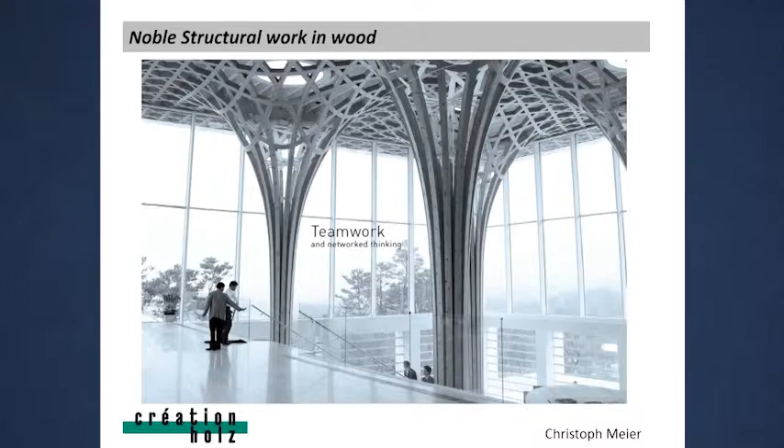Thank you very much, Stephen, also for this invitation. It's the first time I'm here in Canada, and I've enjoyed it very well from day to day. And I hope it's not the last time I'm here.

In our timber team of about 15 engineers and technicians, we realize complex projects around the globe. Of course, for us, wood as a material is sustainable, beautiful, and the best. This is a challenging specialty of our office, and I'm going to tell you something about this work.

I would like to explain briefly how I came to be here. During the holidays in the south of Switzerland or the north of Italy, in a vineyard called in Switzerland a Grotto, I discussed with my wife over a glass of wine whether I should take up the challenge and accept this trip to Canada or not. Canada is a popular country for Swiss people wishing to emigrate and wanting to experience the great freedom of this country. So I said to myself, if not now, then when. After the second bottle of wine, the decision was clear.

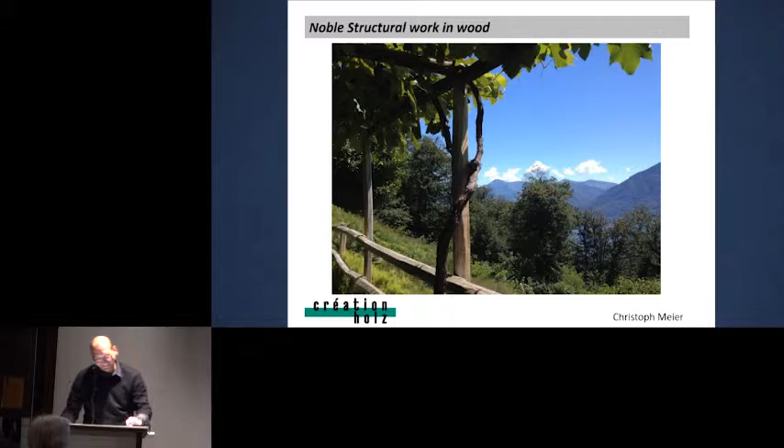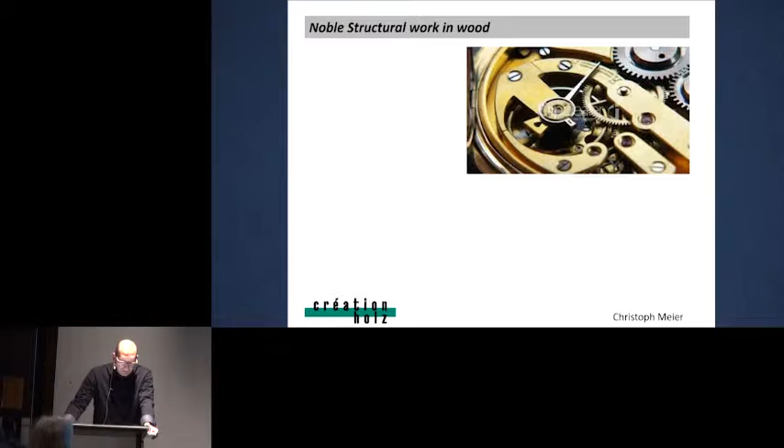It's a piece of cake for you. This happened in spring. From then on, the clock started ticking for me. This clock is a particular symbol of the actual topic of this lecture - it means precision and Swiss quality. These are two important basics for the success of all the complex wooden structures which we are allowed to design every day.

Using examples, I would like to show the development and our journey, from the perspective of an engineer who had no idea how to solve his challenges at the beginning. Essential to this extreme development are primarily the creative ideas of our architects - I know there are a lot of you here - who inspire us again and again to tackle something new. In particular, Shigeru Ban, who is an absolute star architect for us, respected and trusted. If there were no architects, we would not be where we are.

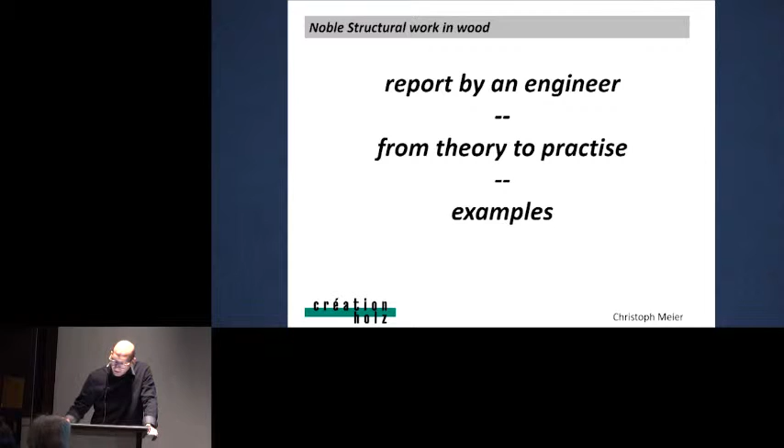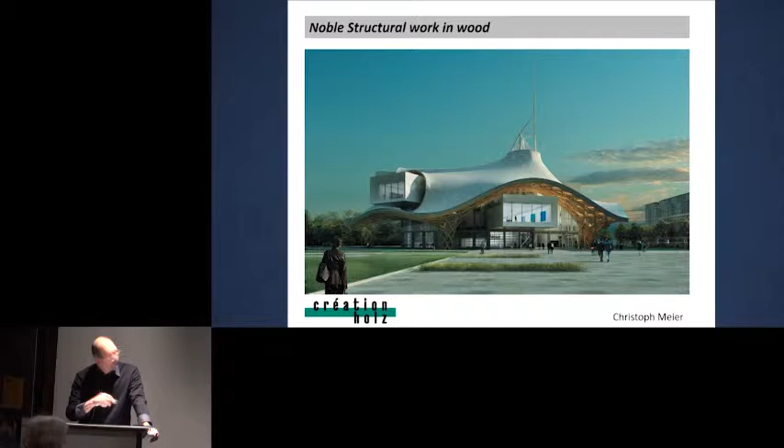The first challenge was born about 10 years ago. Shigeru Ban won the competition for the Centre Pompidou in Metz, a museum for art in France, with a somewhat unique form and a wooden basket roof. I saw this model outside - yes, plus minus the same.

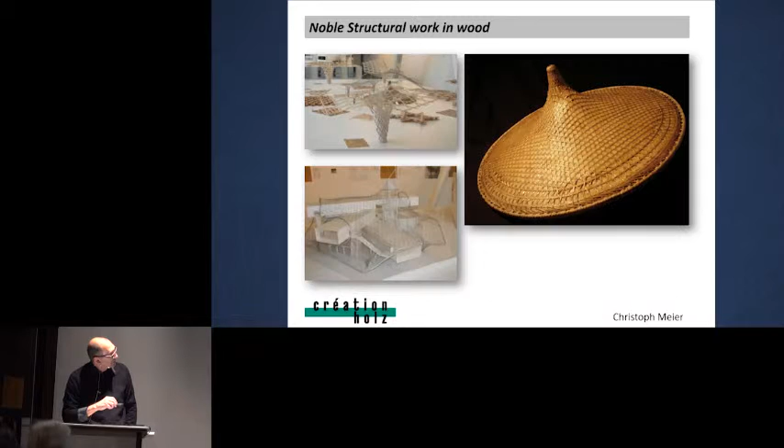Now, what was the inspiration for this project? A straw hat. You might ask, what does a straw hat have to do with a complex timber solution? This was the start for Shigeru Ban and his team. He designed a straw hat-inspired roof over three 100-meter long tubes, which make up the museum. You see it here on the model.

In this difficult geometry, the challenge was to bring the individual parts through each other and frictionally connect them. The design engineer solved this with different nodes and a kind of board staple, which are then bound together with a lot of screws - you see it here in the middle. But since everything is bent, sloped and twisted, this really could not function, and we decided to work it out. Together with a carpentry company, we came up with a variation that included several improvements.

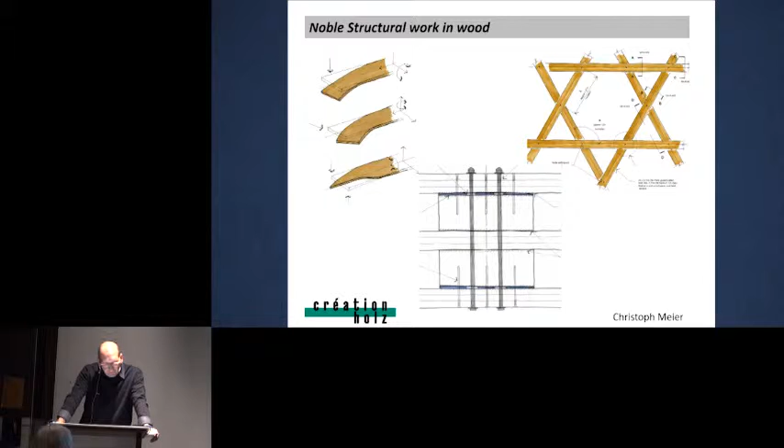It's easy to do this in straw, but how in wood? Our grey eminence, our guru, Hermann Blumer, analyzed the structure with rough calculations and put our team and himself under pressure by posing challenges. The goals were: reduction of the wooden volume of this project by half - this was very important for the budget; a simple connection method for the beams, possible in all positions, twisted diagonals and so on; easy installation, meaning also low cost; and of course, quality and durability.

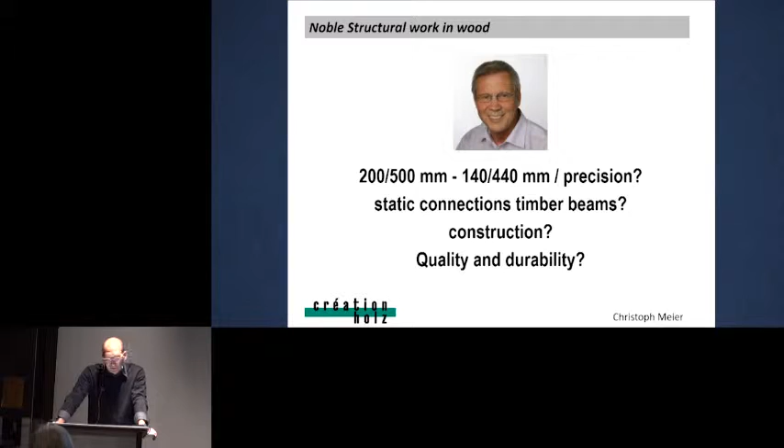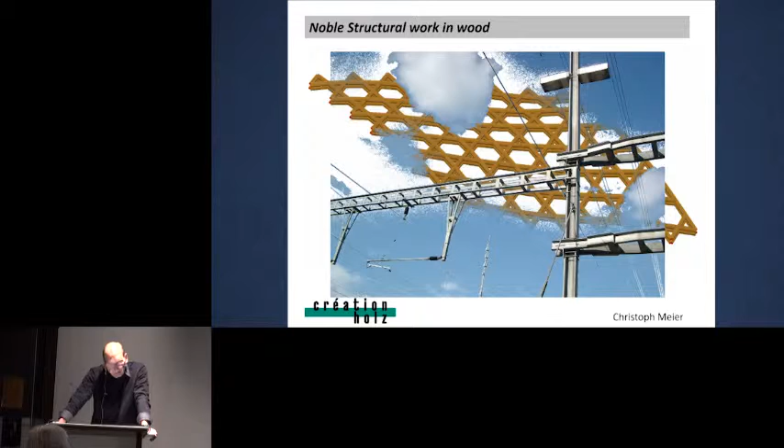Of course, for these things, no standards and regulation exists, and definitely not for timber. To convince the test engineers and also to confirm our theories, a variety of tests were required. Here we see the support consists of two braces, bolts at intermediate points, and shear connectors between to increase the stiffness.

Now what was the result of these tests for bending and deformations? So we could confirm our theory and adjust our static model.

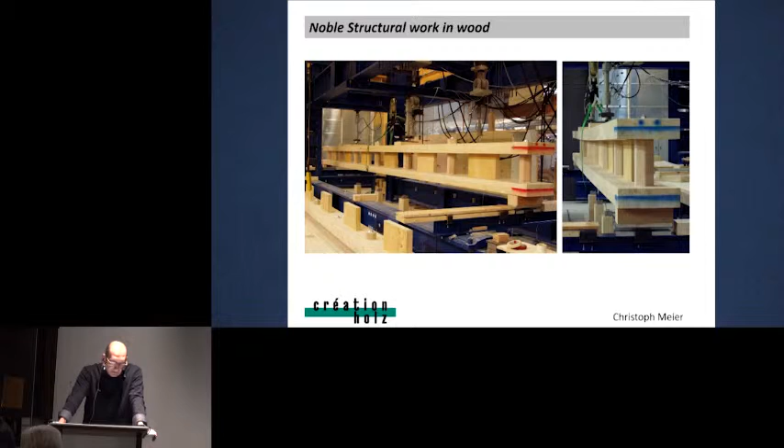The static model for the freeform roof was very complicated. No less than 35,000 bars were modeled precisely for their function. Beside the usual load combinations, also 100 snow and wind load cases had to be considered. The capacity of our IT was pushed to the limits of what is possible. To keep the overview of this volume of data took many, we say in Switzerland, smoking heads and night shifts.

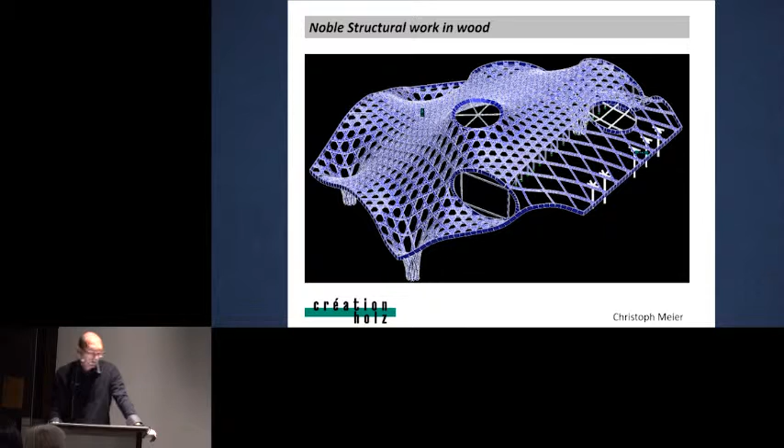Approximately 18 kilometers of supports were milled by CNC machine and delivered in about 3,000 units on site. And when you look on the right in this stack, you see all these pieces. You have to know what's up and down, and you can turn it on all sides, and it's not so easy to say where it is.

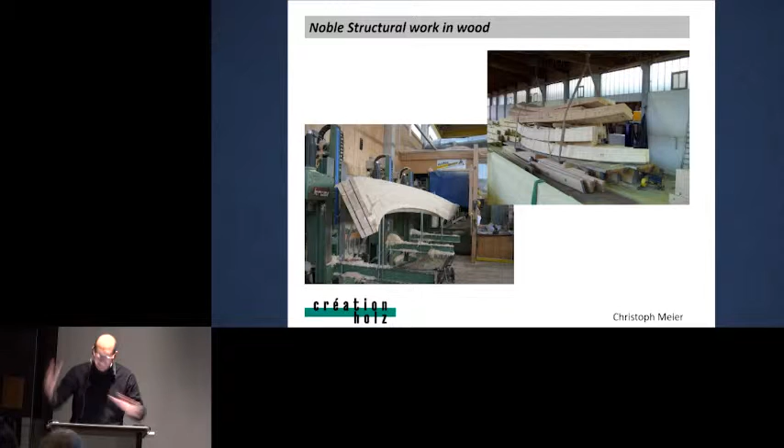And it was a genius idea of the carpenter for positioning these pieces. Without any plan, you could find out the exact location using a number code on the front of the beam. The whole process of the static calculation, the geometry, the material procurement, and production ran totally electronically.

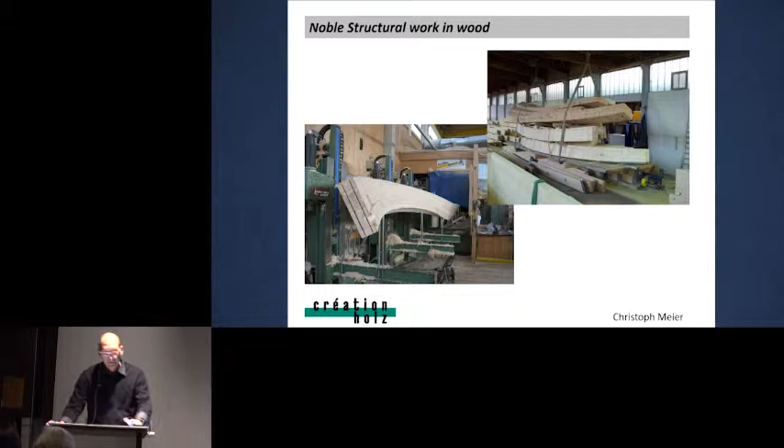The roof was mounted in individual layers. The geometry allowed no tolerances, which would have made assembly impossible. This was our risk. The longest line, one of this layer here, was approximately 90 meters long, and the tolerance was actually in a millimeter range.

Problems happened only at the interfaces with other trades such as steel and concrete. Their dimensional tolerances were very large.

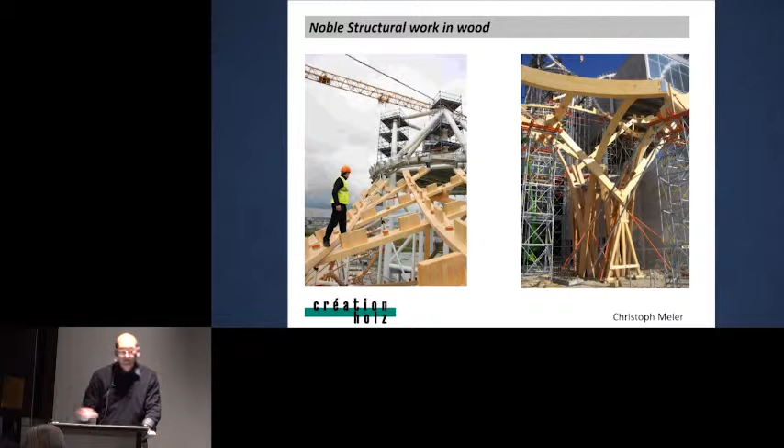The surface area of this roof is approximately 9,000 square meters. The free span from column to column is up to 30 meters, and the top of the steel ring is at a height of 45 meters.

First, the entire wooden structure was erected, and only then was the membrane attached. Assembly time was about 6 months. One difficulty was the direct weathering of the construction during assembly. The parts were provided with temporary paint, so we could protect the timber over this time.

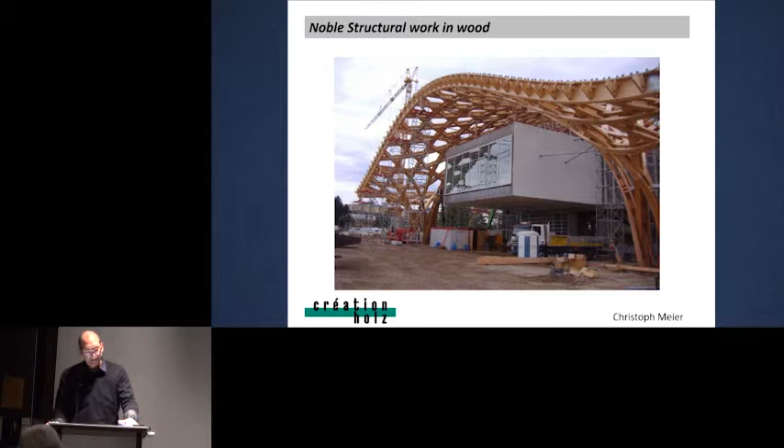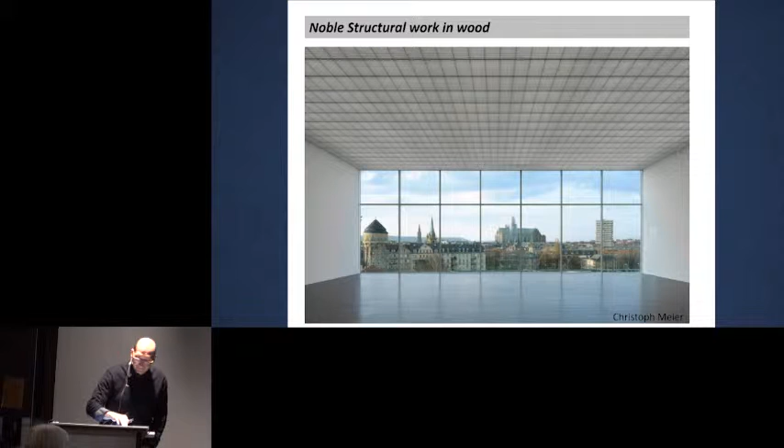Here you see a picture from inside with a view to the city of Metz. And here an example of an exhibited object, a Nietzsche map, not a sketch of mine, but maybe we could do something else.

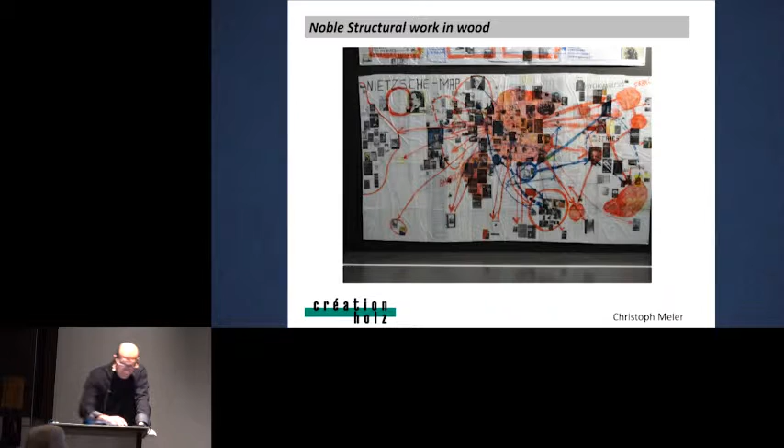2010 was the official opening, but there was a continual audience even during the construction period. Buses with interesting people came almost daily to the site. For the opening, Mr. Sarkozy himself did the honors.

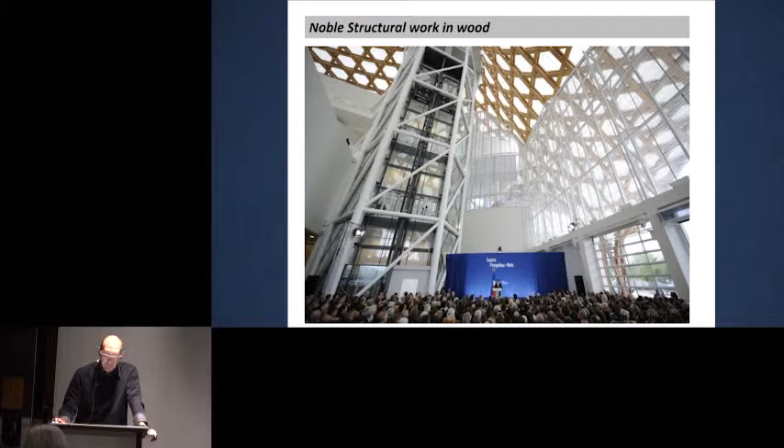But for us, however, satisfied customers are much more important. Here you see Shigeru Ban and Jean de Gastines, the local architect, on the right side, with a smile. That's our goal. This was our start to a new world of wood constructions.

The possibilities were limitless for us, and our ego became inflated. But we were soon brought back to earth. Following that, they have often taken part in competitions with Shigeru Ban, and of course not always won.

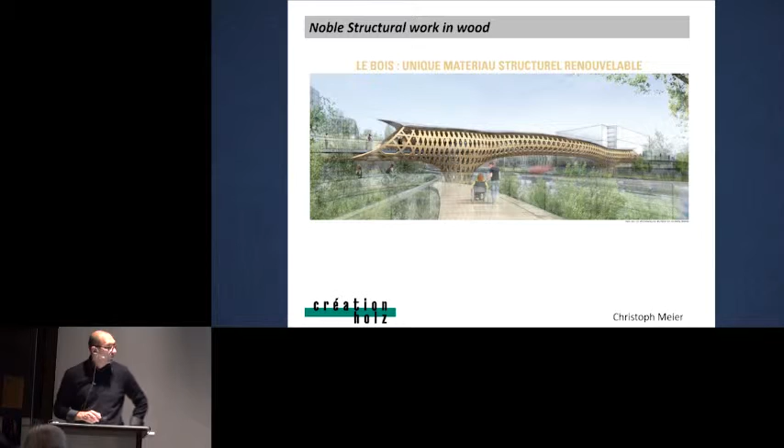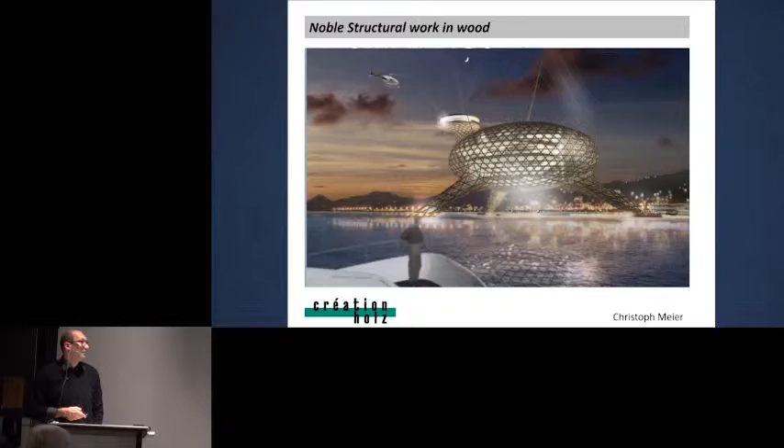Here you see an example of a pedestrian bridge in Paris. Then a pavilion for an expo. It's a little bit fantasy.

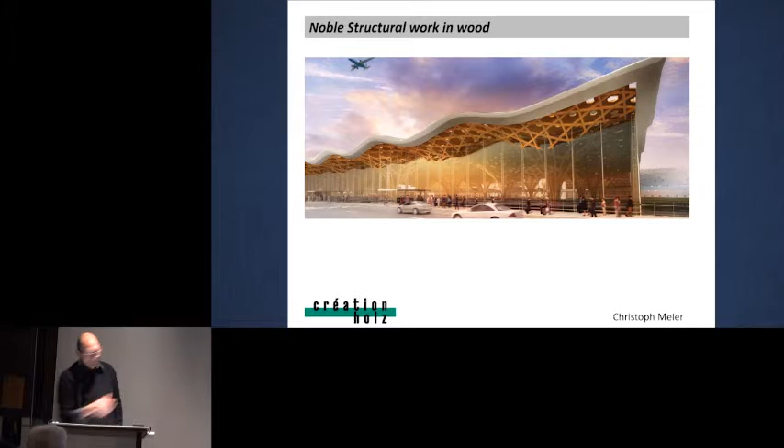An airport building, and I said it also yesterday when I came here to Toronto: this solution looks a little bit warmer and nicer, I think, than this grey construction, but that's my point of view. And typically, you see always this cross-beam construction and this freeform building.

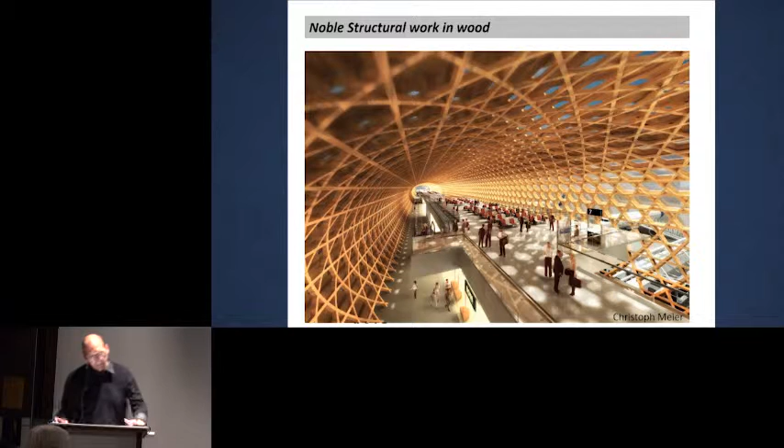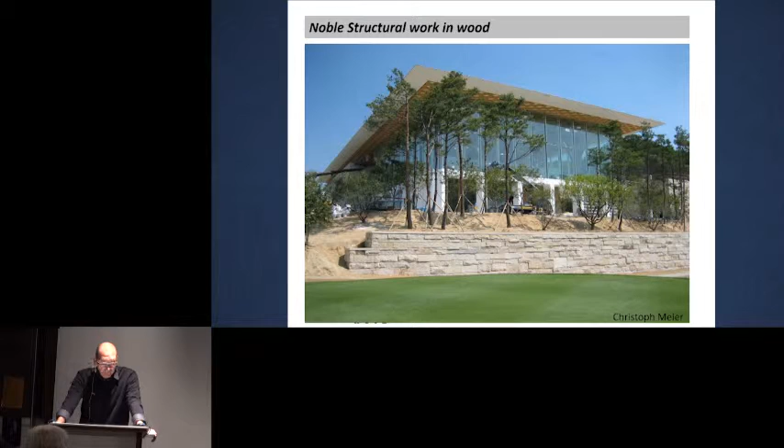Then, once again, a success: the new clubhouse in Yeoju, South Korea. We realized a roof support structure for this exclusive golf clubhouse.

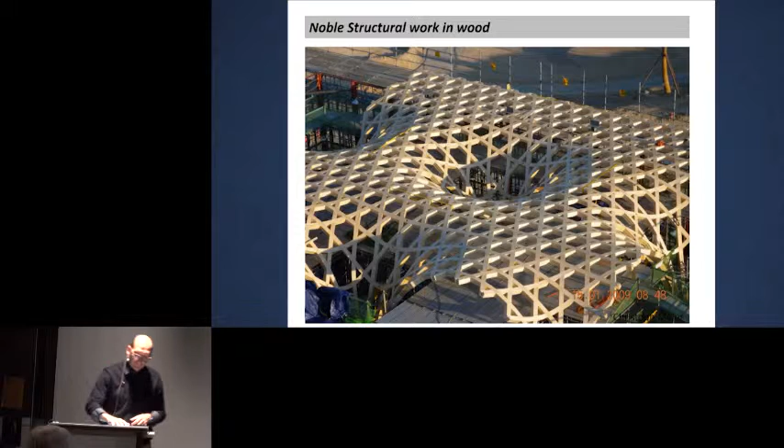The roof area is about 2,000 square meters. The distance from column to column is approximately 9 meters. The column looks like a tee, as needed for tee-off in a golf course. The fire resistance of this construction is about 30 to 60 minutes.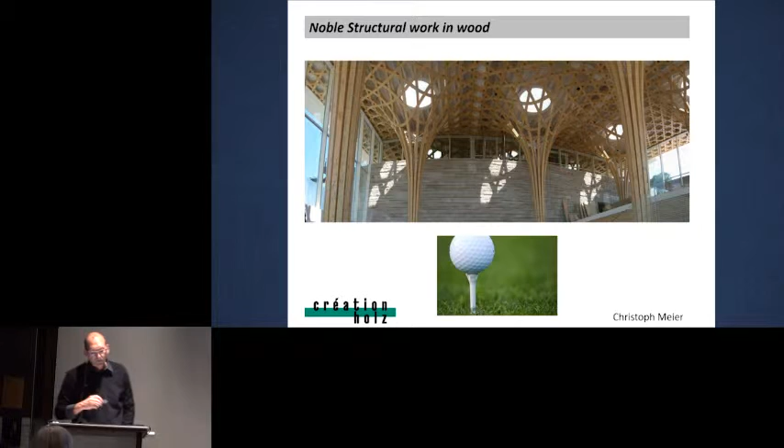On the same date as the installation of Metz and Korea, Shigeru Ban won the competition for a new building in Zurich, the Tamedia project. Finally, a project in Switzerland, not so far away, of course for me, not for you.

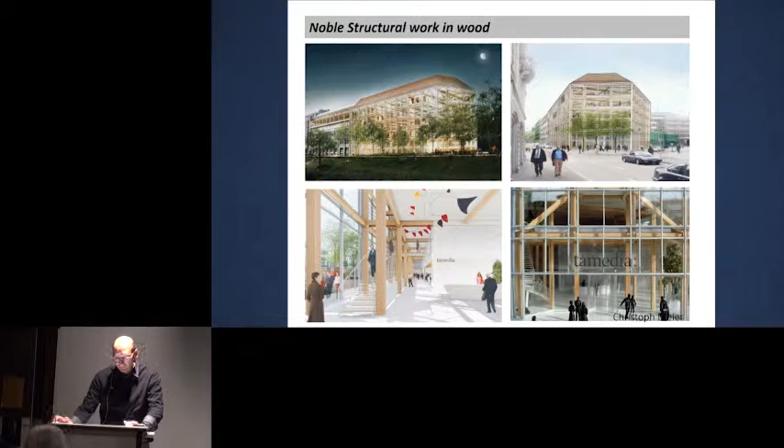A geometrically simple design, at least at first sight, meant no longer a challenge for us, but we were also wrong. The targets we are able to directly read out from the daily press. The headlines were: intricate structure of wood and glass, sustainable contribution to architecture, CO2 neutral and environmentally friendly, and so on.

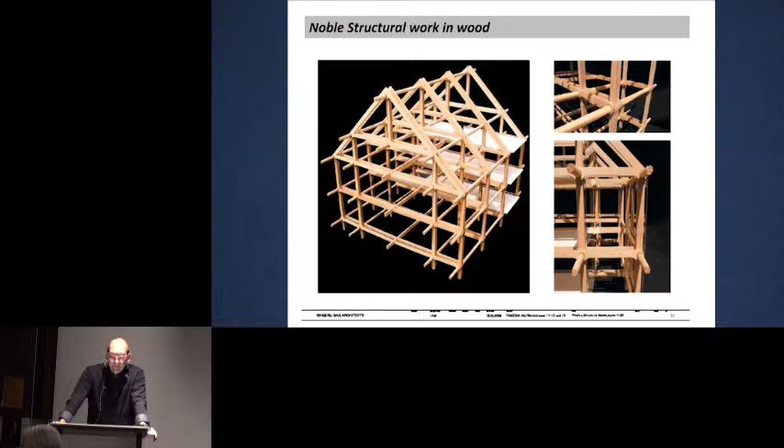The idea was also presented in a model: wooden sticks composed as a mechanism, without any metal, and glazed on all sides. These were the challenges.

The basic structure is carrier trusses, strictly geometrical, composed bionically. You see it a little here in this node. In bone-like nodes, an oval node is inserted. This gives the connection a certain stability and a framework.

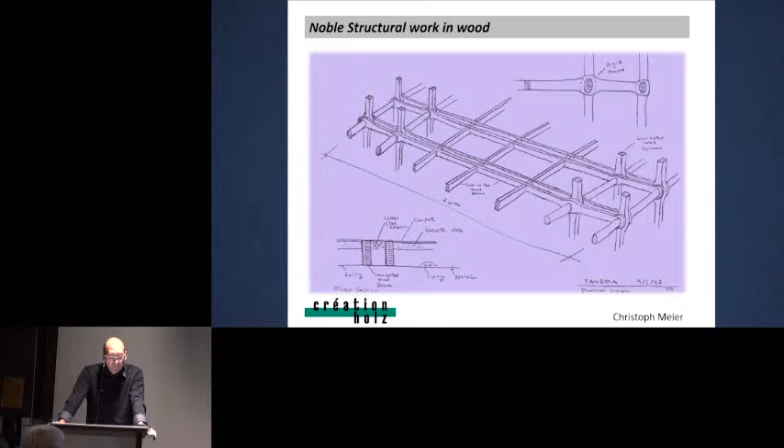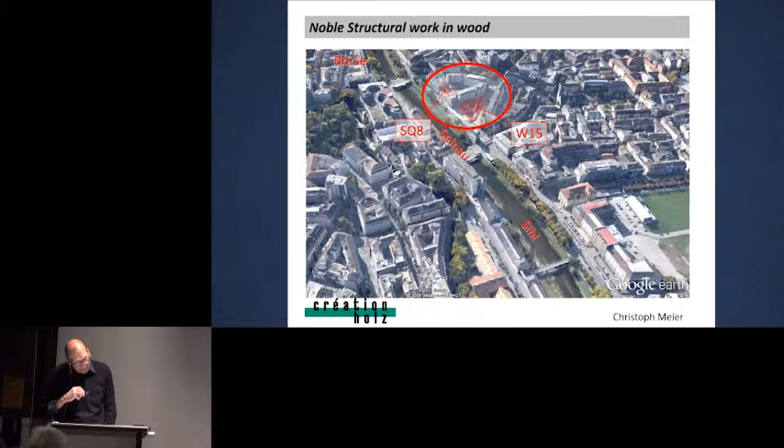The building is located in the city of Zurich, in a prominent location next to the river, you see it here, and close to the main train station, and near the stock exchange, where you can lose or win your money. You know Switzerland.

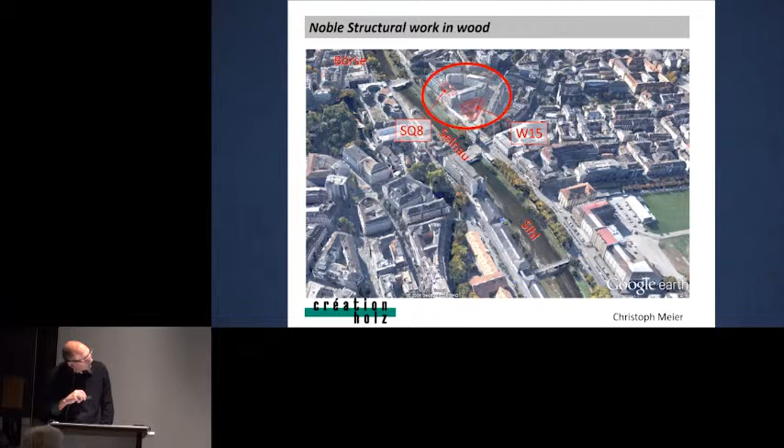So, I said we have two parts of the building. One is SQ8, I'll tell it later, and the other is W15. The project contained two different building complexes.

The first part of the project was to build an additional floor on top of a 100-year-old building. You see it here, this 100-year-old building, and we have these 2 upper floors. The material wood is, of course, particularly suitable for the low dead weight of the construction.

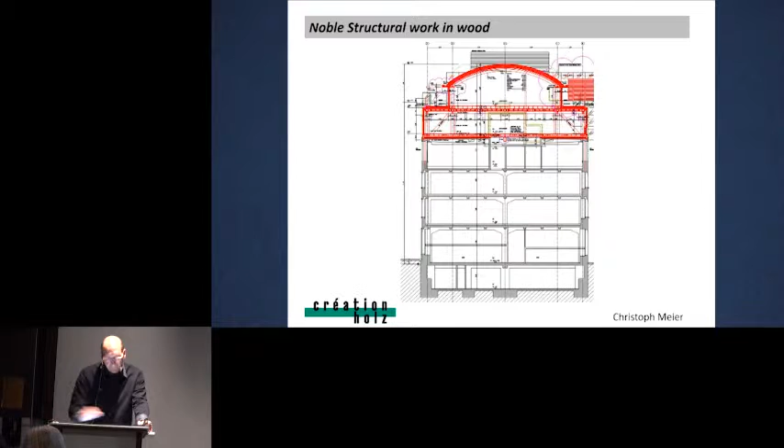The dimension in transverse direction is about 20 meters. The arched roof was originally planned with diagonal cross beams, like we saw before in all these competitions, but it was simplified to save costs.

The vertical load of this increase had to be derived in the outer facade and in the center line. There we have a steel grate used, you see it here a little downside. This information is only for students.

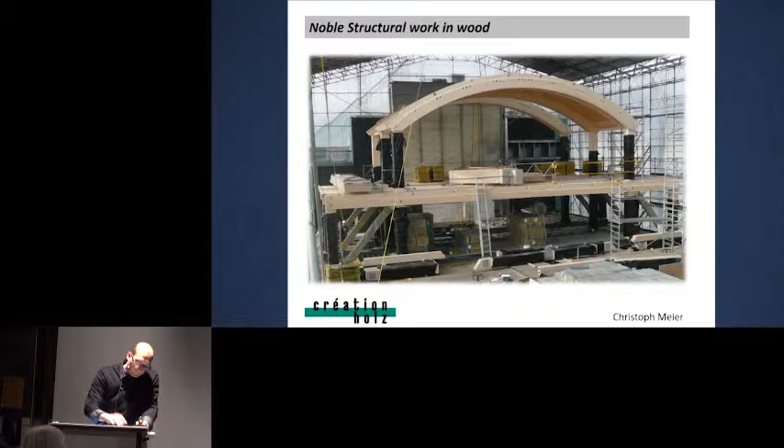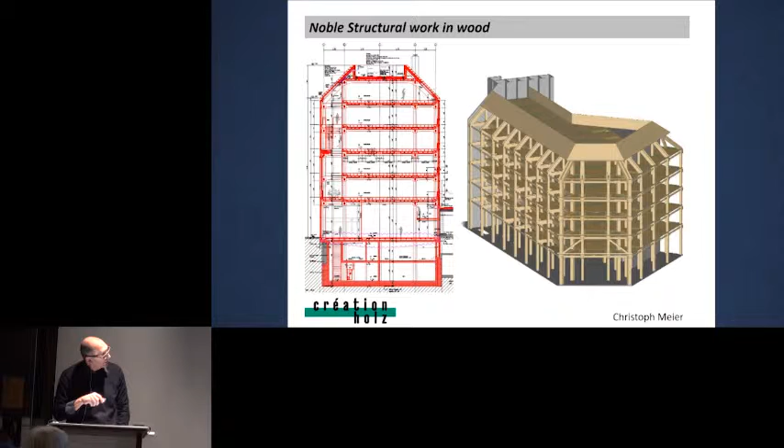A big danger was the fire risk in this building. The authority did not grant permission at first - the fire load potential was too great.

So we proposed to do the whole construction in oak, because oak has a different fire characteristic number than spruce. You know that's the reason why oak burns longer in a chimney than spruce.

But the most important thing for me was that we also planned without metal compounds, as specified in the model. Since we were not used to doing this, we had to look for new ideas.

We copied an example that we all know for this problem. Based on hole reinforcers for paper in a ring binder folder, we developed plywood deposits in the primary beams and supports.

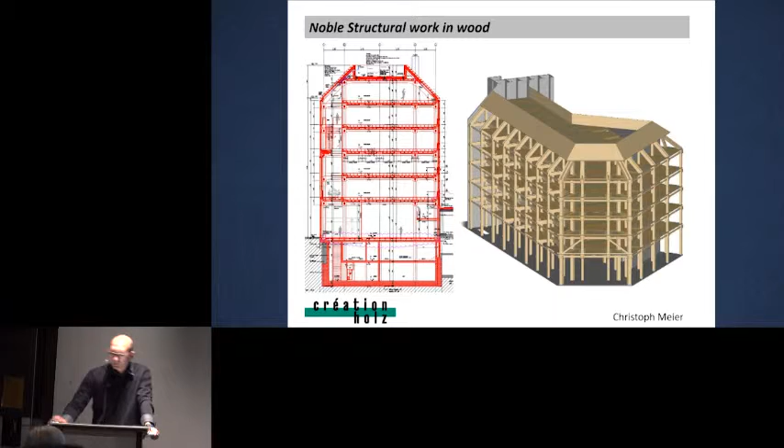From my point of view, the creation of a one-to-one model for such a task is very essential. A future building in large format becomes reality when you can feel and touch it.

So every detail was discussed and determined exactly with the client and all planners, especially with Shigeru Ban himself.

The wood selection ranged from oak and ash and white pine to normal glulam in spruce. Oak, we heard, because the fire resistance is much better. Ash has a better strength property and looks nicer, more appealing.

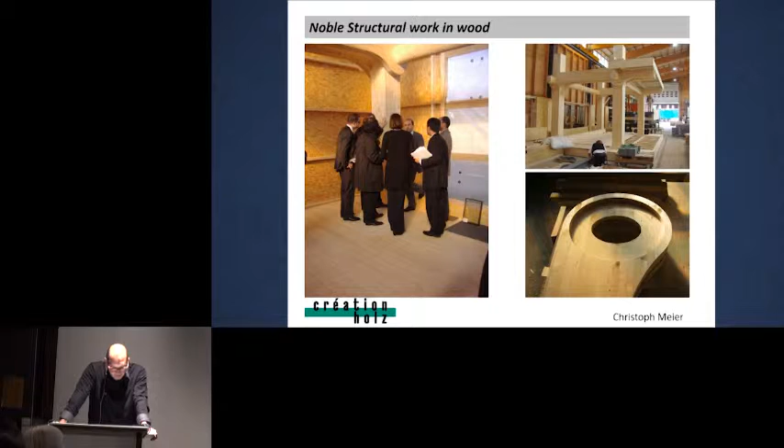At the end it was spruce. The strain and the laminated wood came from Austria, grown about 1,500 meters above sea level, with the characteristic fine structure of the annual rings and little branches.

Here you can see the principle of the connection between beam and column. Beech plywood was glued as hole reinforcement, here and here. The wooden reinforcements are introduced without being visible.

Now, the manufacturing tolerances were a major issue. From the view of an engineer, the desire was, of course, the absolute minimum tolerance, 0 mil. And the manufacturer naturally wanted as much as possible. Slippage in the connection system and additional deformations were the critical points for us.

So we always defined the static contact points with 0 mil, and on the other side with 3 or 4 mil. This means by the column on the underside and by the beam on the upper side 0, and the other one with the tolerance.

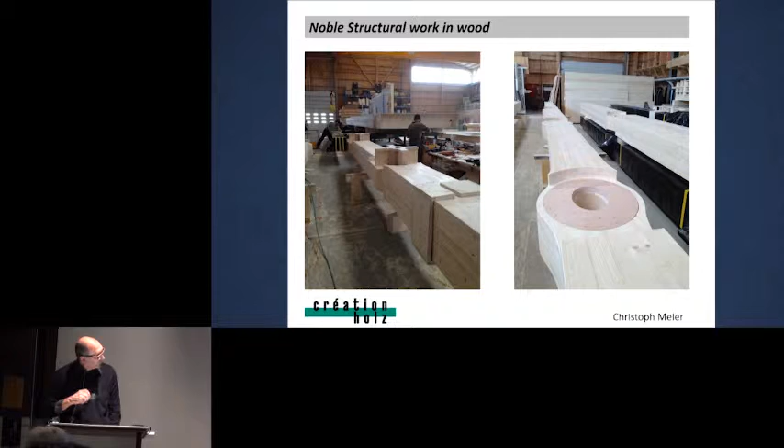Here are some pictures of the production of one column. The length of one piece was about 20 to 21 meters, the cross section about 44 by 44 centimeters, and the weight of one piece 2 tons.

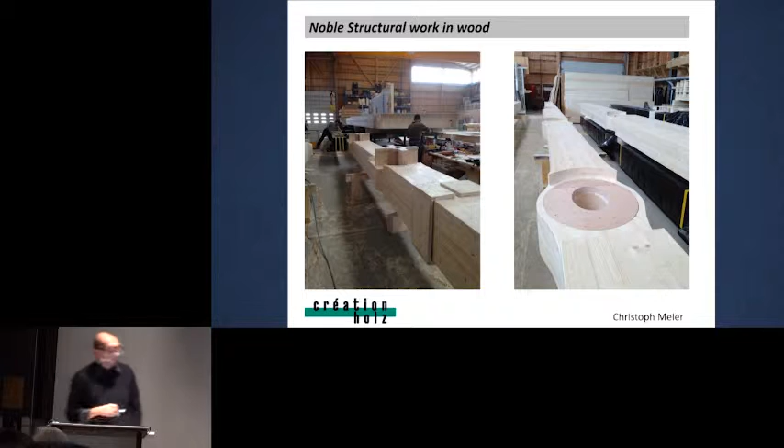The surfaces were not treated and only given a temporary weather protection. All the parts are wrapped with foil so discoloration could be prevented. The sensitive parts of beech were additionally provided with a coating against moisture, as a result, shrinking and swelling could be prevented.

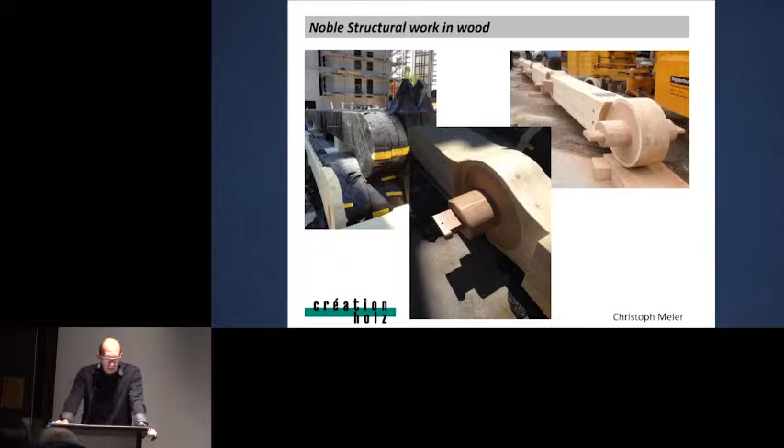Now I'll illustrate some interesting details about the high precision. Many components penetrate a fire compartment rated 30 or 60 minutes, so all window frames had to be cut out. In this cutout, a plaster board is glued inside and afterwards covered with a wooden veneer.

Of course, the staircase must be as inconspicuous as possible and have a lot of transparency. Specifically, the cantilever and overhang platforms and staircases are built in steel, with only one fixed point on the left side, the rest is overhanging.

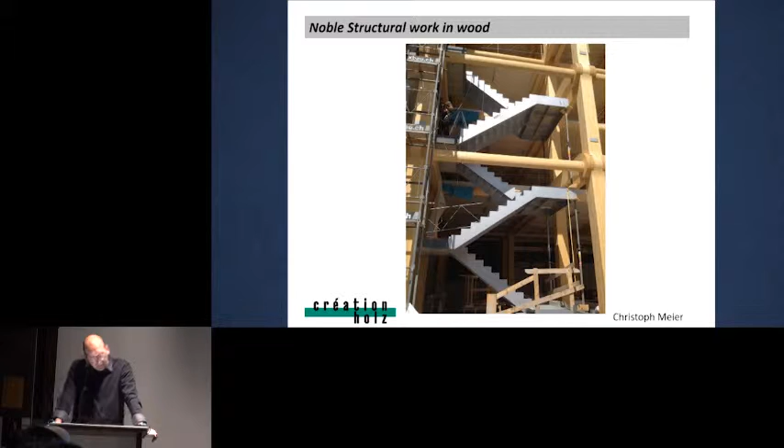To watch the assembly was very interesting, as a void and first fixed point at the concrete core was used. Here the first frame was assembled as a complete section with a mobile crane in the correct position. Then the ovals and the ceiling elements were laid in. This framework was used again as a template for the next, and so it went on in a weekly rhythm.

It was really sensational, as the parts like Lego or Meccano could just be plugged together. I still get goosebumps when I think about it.

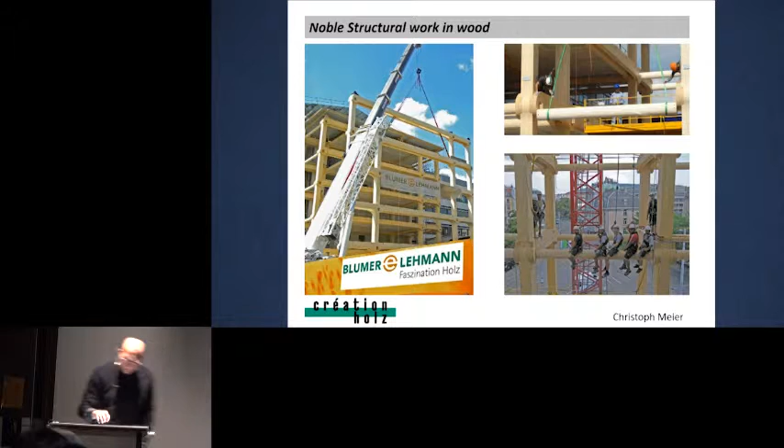In the columns, the base plates were implemented for the facade construction, and the facade profiles matched very well without any tolerances.

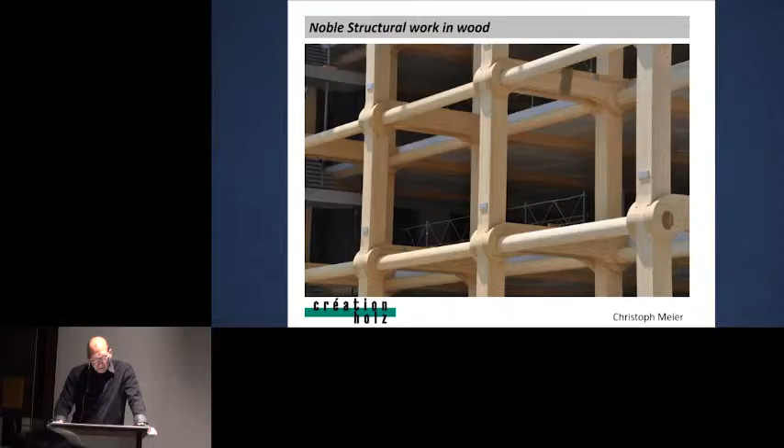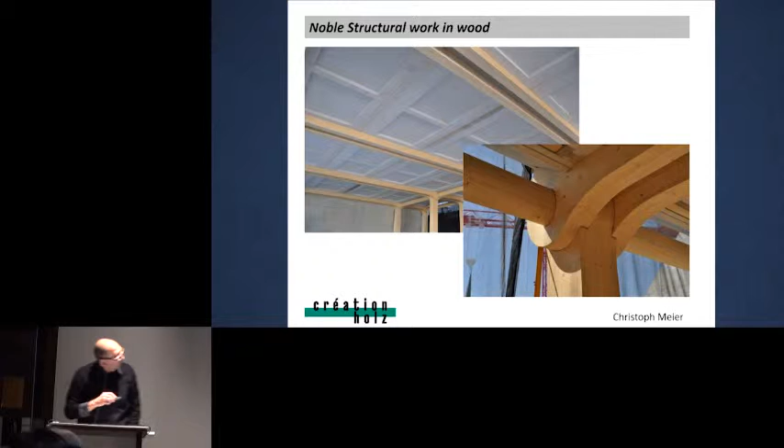Every detail has been maintained and developed with the architect. The soffit is made so that the metal sail can be installed with acoustic and cooling elements. The slab edge was tapered to the facade side to bring as much light as possible into the room.

All installations were performed in a double raised floor on top. Sprinkler, lighting, heating and cooling had to be conducted through the ceiling. The box girder ceilings made of wooden material are filled with sand and insulation.

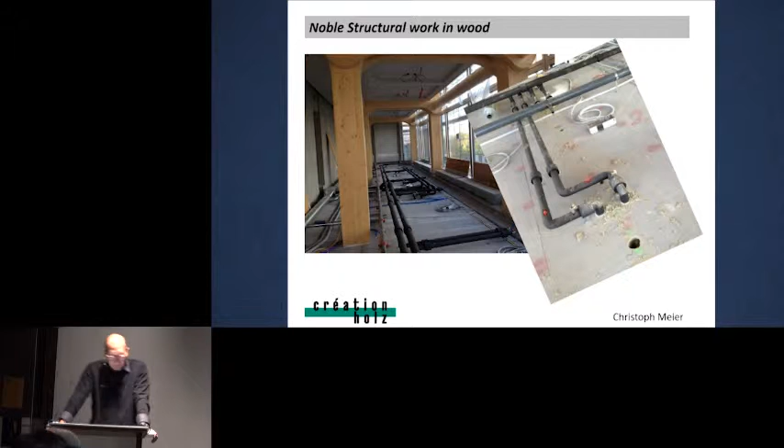We had to design and plan the exact position of all these points. Approximately 3,500 holes had to be drilled, precisely coordinated. The fire resistance of the ceiling is 60 minutes, so corresponding penetrations were required.

As I said before, one challenge was that the supporting structure penetrates a glazed section which is built with 30 or 60 minute fire resistance. To prevent fire at the glass fiber connection, plaster strips were always glued onto the structure and covered with veneer again.

When you look exactly, you see here a strip with a gap. Here is veneer, and here is the timber normal. It was very precise work, and this applies also for these ovals here. It was very high quality.

From the outside, the building appears relatively simple and metallic. On the south side of the building, facing the river, glass shutters were implemented. The rooms behind are given the feeling of an open balcony with this effect. These offices are used for meetings, conferences and breaks, and are very popular.

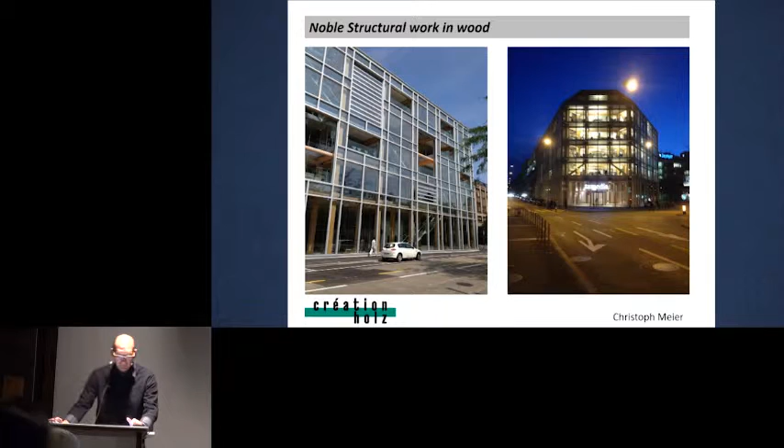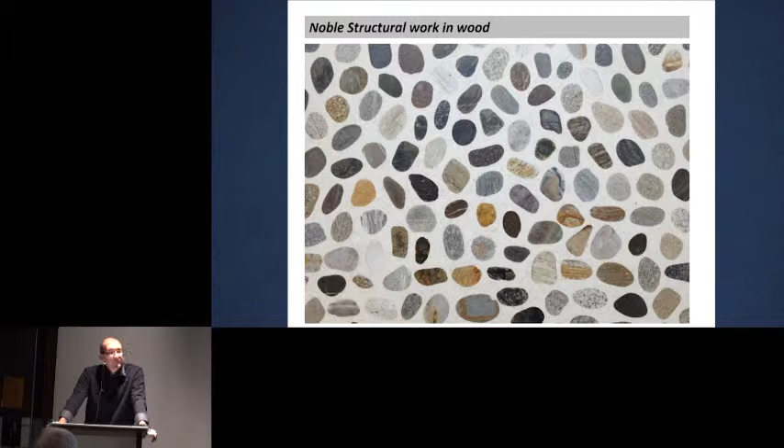When you enter the building, you are on a special stone ground floor. Stones from the river, cut and ground like a terrazzo floor. This was the most expensive part of this building, not the wood.

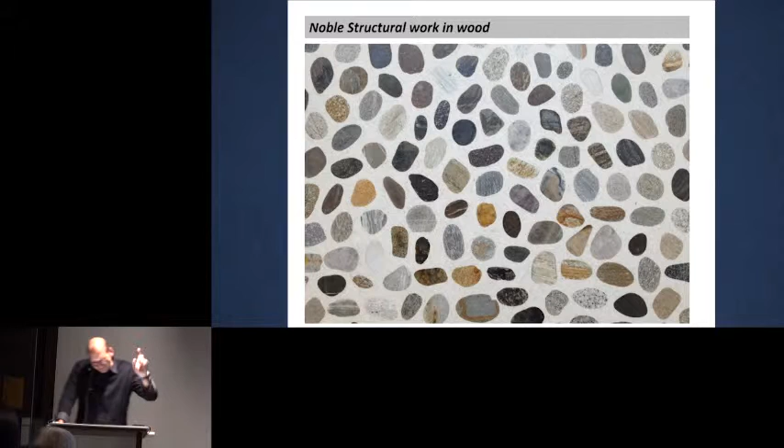The entrance was generously designed in terms of space to create an imposing first impression for all visitors. The transitions to the concrete core are detailed and styled as well.

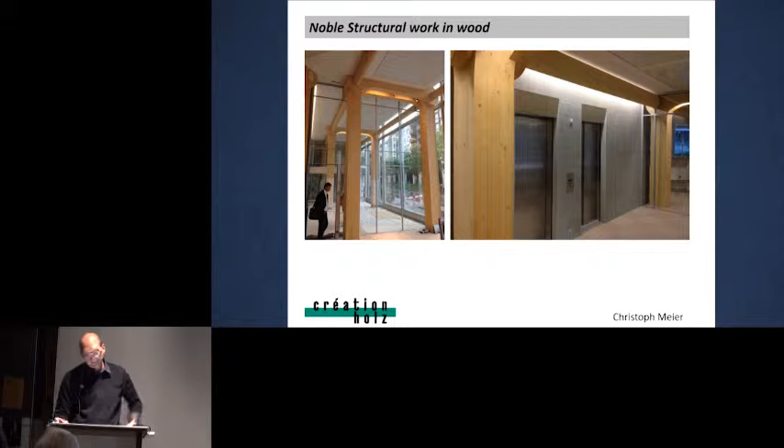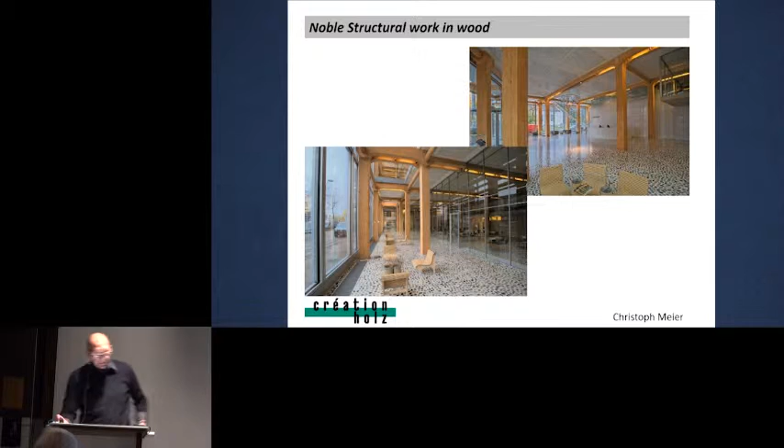The ceiling soffits contain all installations: acoustic, heating and cooling, sprinkler, everything. The transparency and ease, I think, is very impressive.

The owner and his staff members are enthusiastic and confident even after 2 years. The employees were skeptical at the beginning of this building type, but not now. The interest in this building is very impressive, there will be about 100 tours a year, and the demand is still high.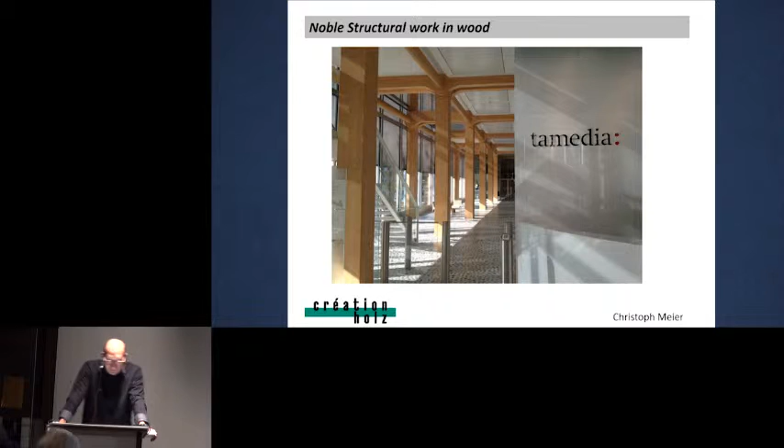Maybe if you are in Switzerland, please get in touch with me and I'll show you these nice things.

Now in the second part, I would like to give you a little overview of our current activities with Shigeru Ban and our works with wood.

Here we set again a challenge to gradually increase the requirements. Swatch is building a new headquarters and Omega a new production building, and this of course in wood.

The planned museum is located between the two buildings and will have a conference room to fit about 500 people. This is a museum, you see it here as a museum, and here is the conference room.

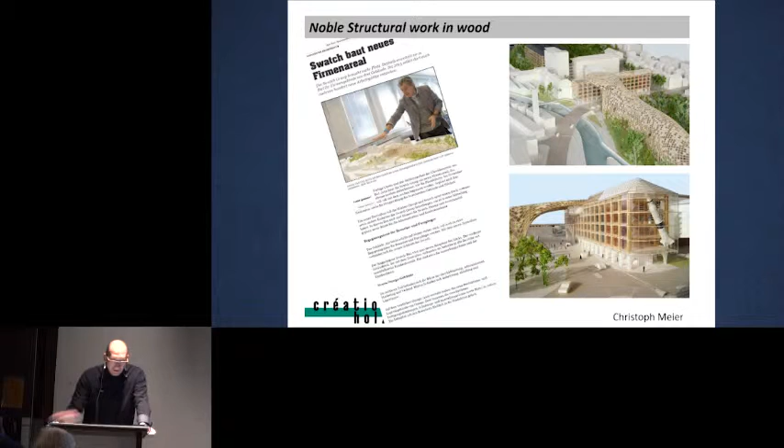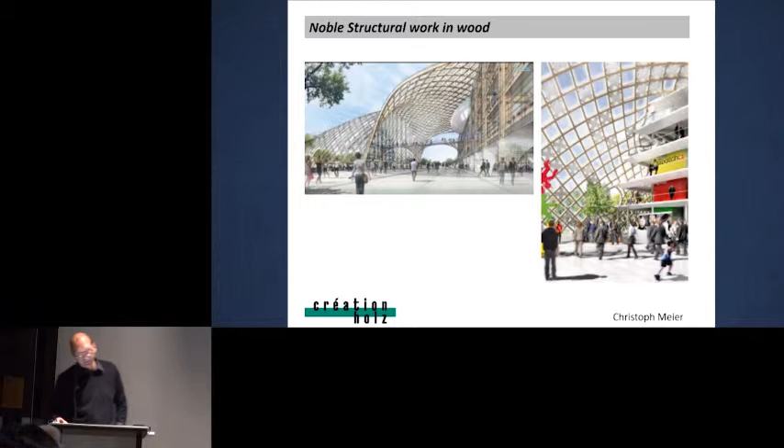This building with this freeform structure has a transparent and insulated outer shell. The office floors are open in this great freeform space. Here is a visualization aerial view of this building.

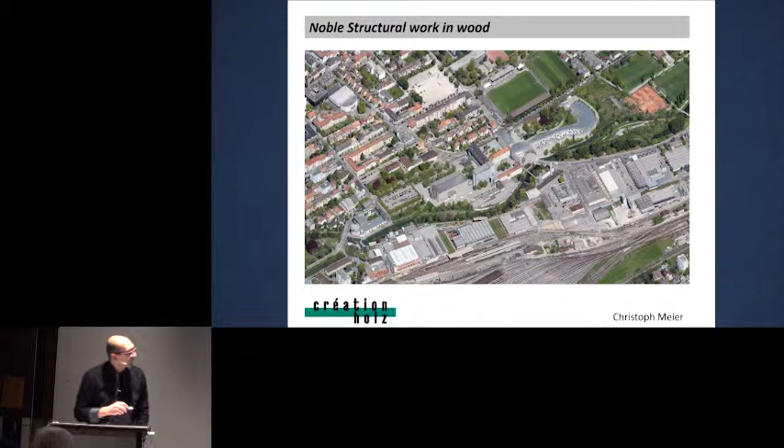You see here this is the headquarter, storage and offices. It looks a little bit like a snake. The building goes over the street, and at the head is the conference room for about 500 people. This is the museum, and here is the building for the Omega fabrication.

The plan is to complete this building in about 2017, plus or minus 3 years. I said plus minus, not 2070.

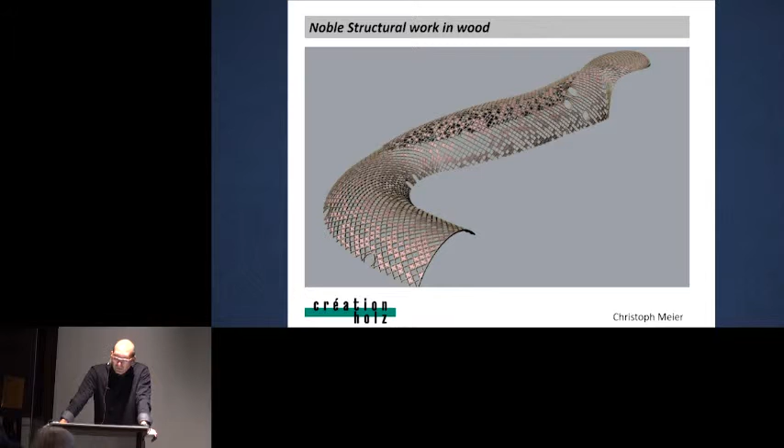The support structure is formed using cantilever beams diagonally crossed. The carriers are constructed precisely in different cross beam positions. You see here the principle of these layers, 1, 2, 3, 4 layers, and you stick them only together, of course without any metal.

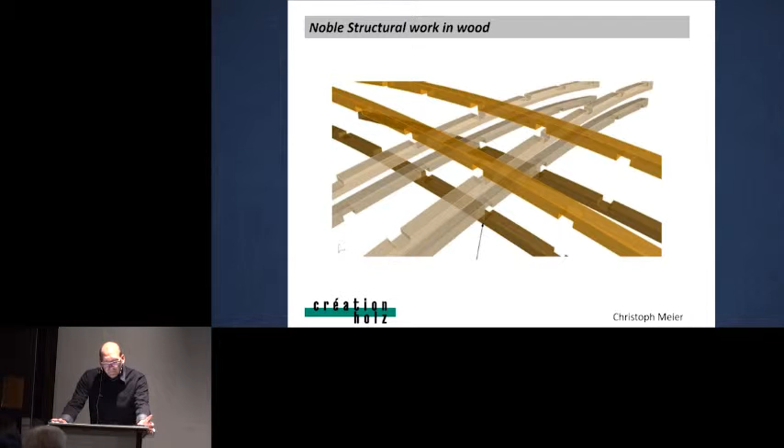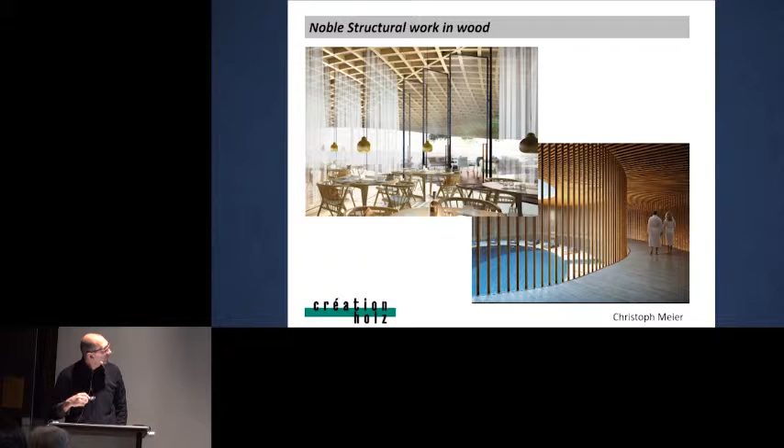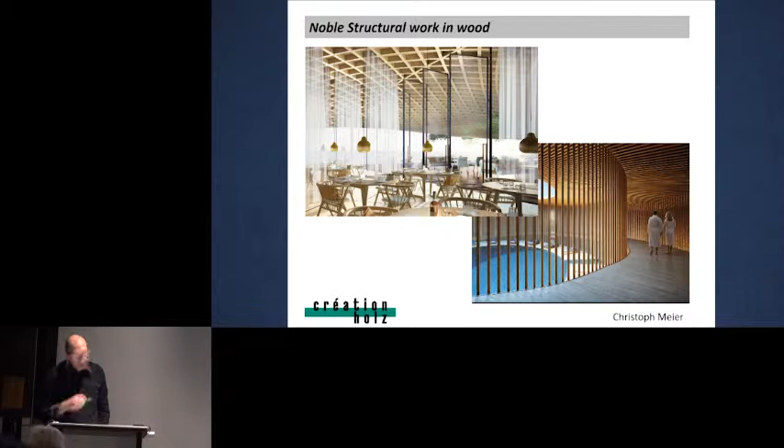Then a totally different thing is a resort in Turkey, not with Shigeru Ban, but with Norman Foster, London. You see it's a hotel resort with villas and spa and so on, everything you need when you have money, and also with this grid shell in the same style as we saw before.

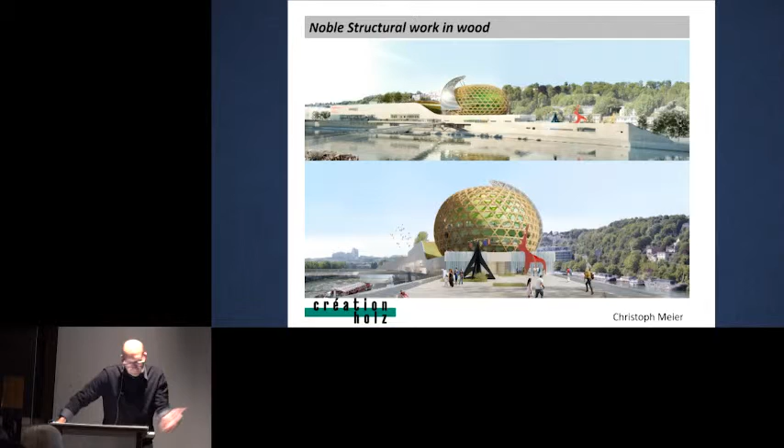Another spectacular building we are going to build in Paris, the outer structure for an opera house, and this is also a Shigeru Ban project. The installation should be completed in 1 year. Again, we will apply new connection technology and put everything together without any metal.

Noble structural work in wood and only in wood. So come to Europe and visit us. We would be more than happy to show you around. Thank you very much.

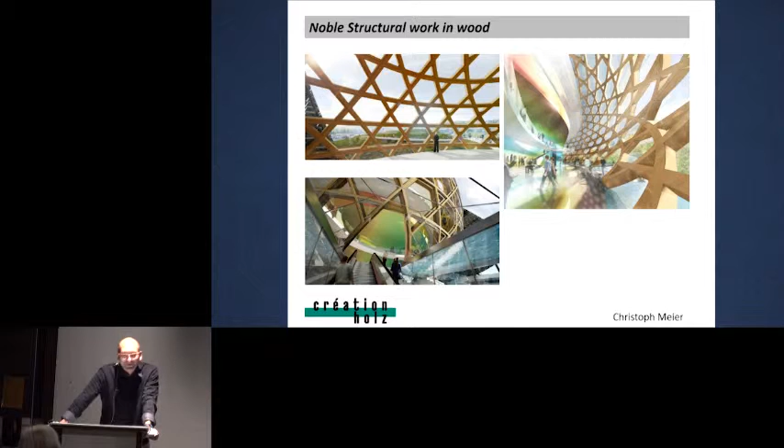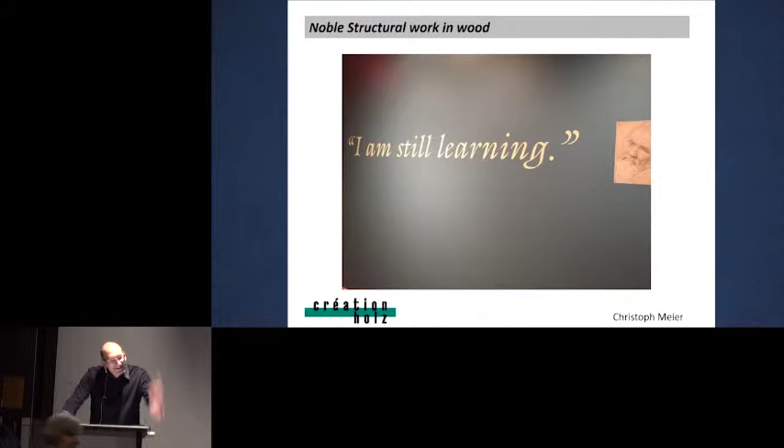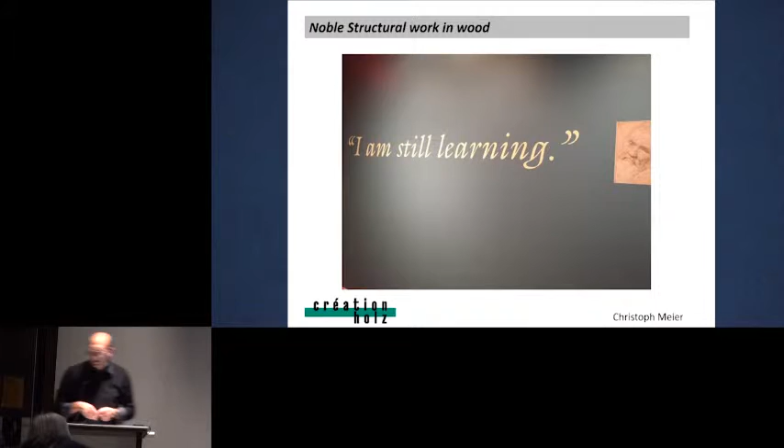Yes, I forgot it. Today I was at the art gallery by Michelangelo, and at the end I took a picture of this, and here are a lot of students, and here you can see I'm still learning. I want to say to you, it's for everyone, but learning in wood, it's important. Okay, now I'm finished. Thank you.

Would you take any questions? Yeah, when you have, I hope I can. My English is not so good, a little bit small, but I hope I can answer.

You want to drink a beer?

I said it before, for us we are only engineers, and the ideas come from you, from the architects. I think what makes the difference from a normal engineer to a special engineer is when you have the same feeling with the architect, and you can understand what he wants, then you have good solutions at the end. And it could be a Canadian architect, like a Japanese, and so on.